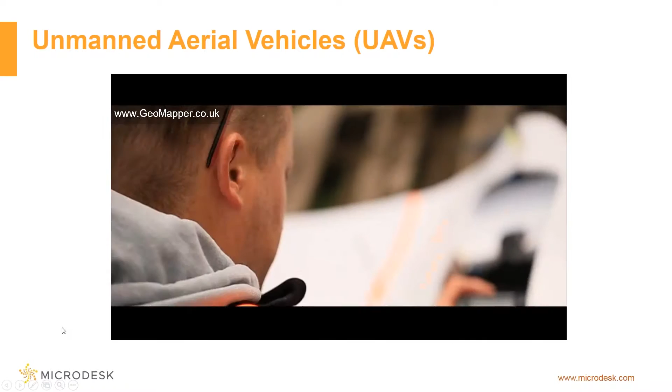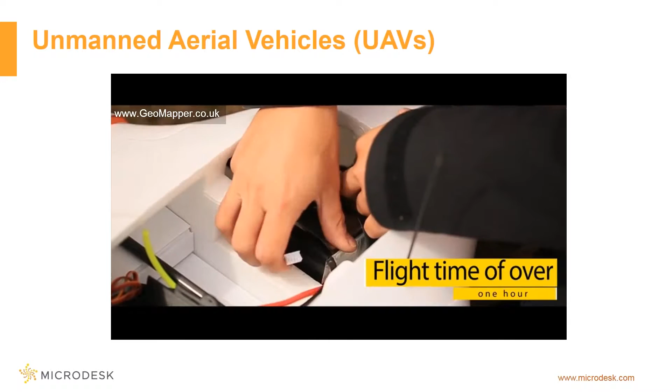I don't know if everybody else is experiencing this, but this is the fourth time I've watched this video restart. Slight technical difficulty, I apologize for that. So we'll let it run, hopefully it'll work out, but let's talk a little bit.

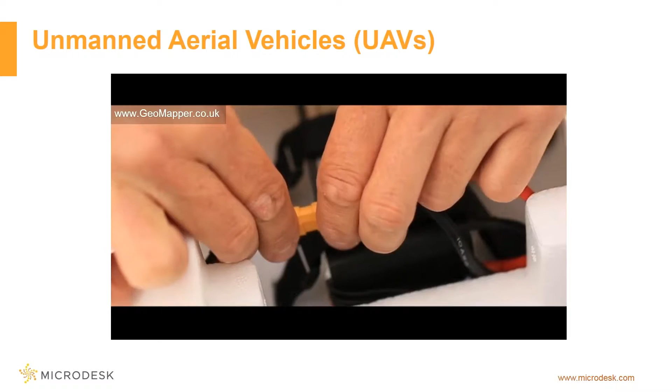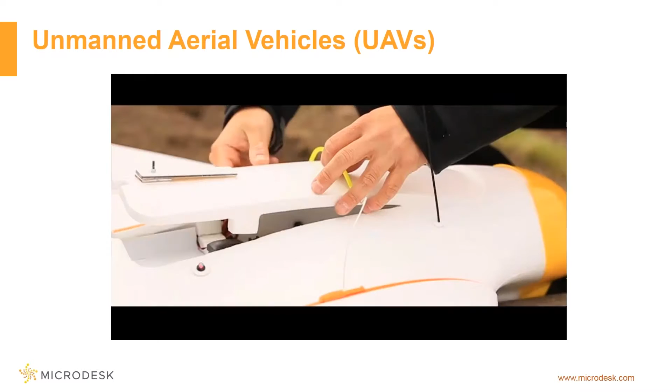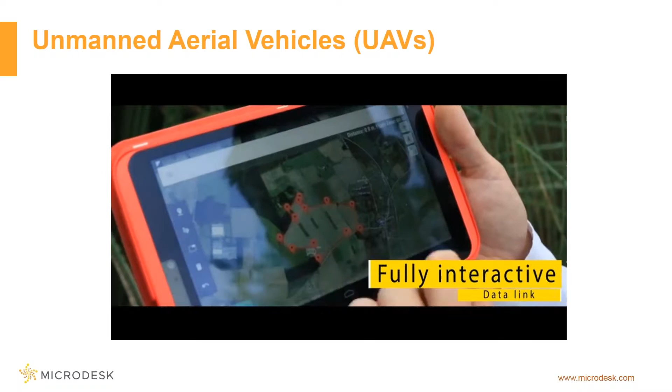I'm sure most of you have heard of them, but for those who haven't, UAVs, unmanned aerial vehicles, also referred to as unmanned aerial systems, are for all intents and purposes drones. UAVs are becoming increasingly popular as emerging technology in many industries. The lower cost of aircraft, cameras, and software, coupled with increased processing speed, cloud computing, and flight autonomy, has accelerated the adoption of UAVs to create existing conditions models, and they're also used for site inspections during construction.

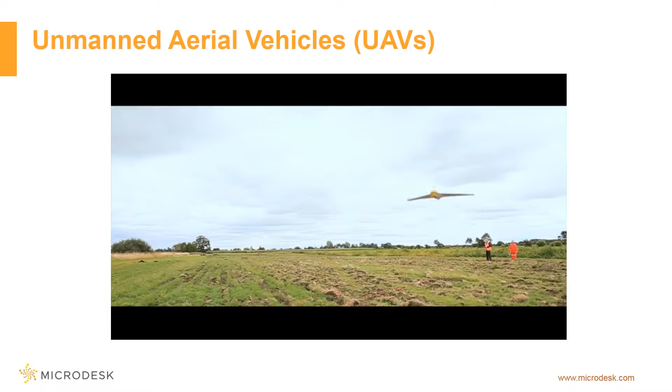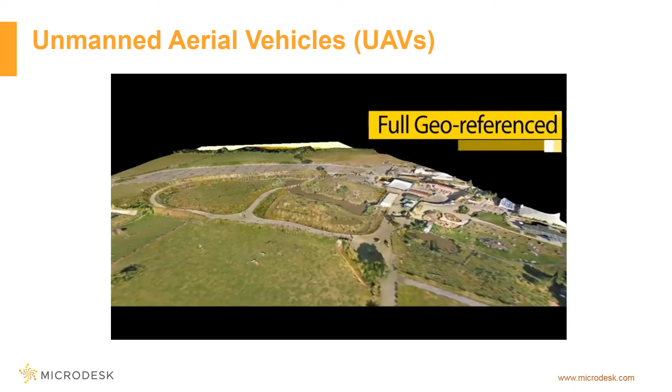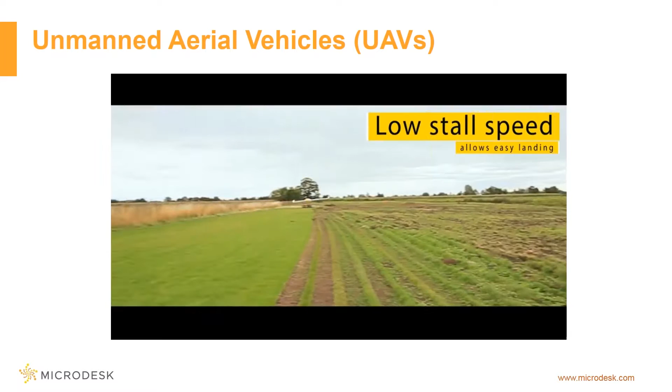LiDAR, or photogrammetry, is gathered through the use of high-definition scanners or cameras. They're mounted on a gimbal from the aircraft, and the UAVs can be remote controlled or have their flight plans automated. As seen in this video, once collected, the information is then stitched together using software such as Autodesk's ReCap 360 Pro, which will produce point clouds or models of the information.

This emerging technology is also becoming increasingly popular for developing planimetric features, volumetric surveys, pollution modeling, urban planning, coastline management, oil and gas exploration, and archaeological surveys necessary for federal environmental studies. This technology allows existing site conditions to be recorded and modeled in hours instead of days, and can produce more accurate data than traditional ground surveys.

Remember, we want to produce faster, higher quality data.

In my experience, surveyors are very particular about the topographic survey. With the advancements of BIM and the pressure to adopt BIM for civil infrastructure, skepticism abounds. Almost a year ago, a study was performed by McIntosh Perry Surveying and UKKO, a Canadian mining and surveying firm specializing in UAV aerial topographic survey.

The task was to compare the horizontal and vertical accuracies of ground RTK GPS survey to UAV surveys. The field topographic survey resulted in acquiring 1,800 data points over a 100-acre site. Each point had an X, Y, and Z coordinate, and a digital terrain model was produced. The field accuracies were observed to provide results between 3 and 8 centimeters in each of the 3 axes over 95% of the observations. The combined accuracies averaged between 5 and 6 centimeters, an acceptable level for subdivision development and drainage modeling.

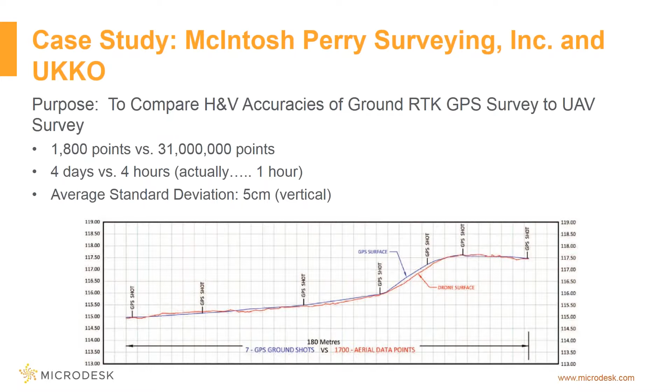All right, let's hope this video plays better than the last one did. All right. Start off a little bit slow on my end.

That's okay. So with UAVs conducting aerial LiDAR and photogrammetry surveys, the process and management of survey data will experience a major shift. The point clouds, meshes, and 3D solids will be referred to in lieu of returning to the site for additional field observation. The collected data will be edited and transformed to be used as terrain surfaces for watershed analysis and site planning.

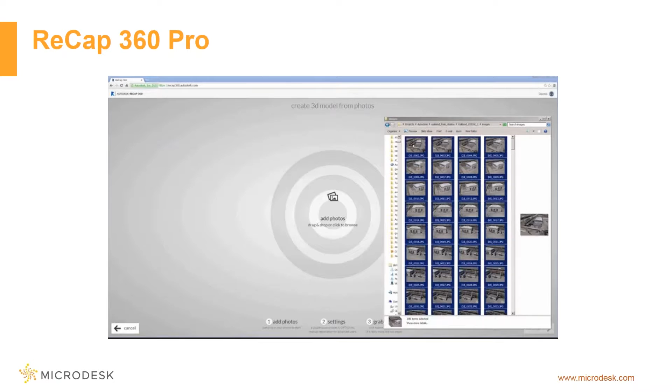This provides us with an opportunity to explore Autodesk's Recap 360 Pro. For those of you not familiar with Recap, this tool allows you to collect and process your point cloud and your UAV data into a single mesh model, as well as perform cleanup and geolocation.

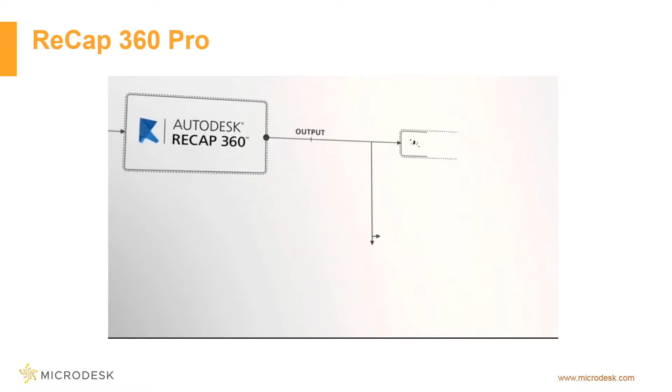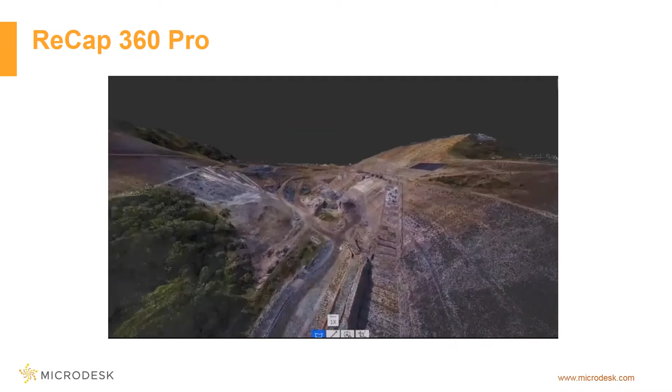Recap Pro also allows users to obtain measurements based on accuracy of points, generate reports directly from the software, and also gives you the ability to import ground control points and process photogrammetry obtained through UAVs. The collection of the data is of higher quality and is obtained faster, resulting in reduced project costs due to acquisitions and accuracies.

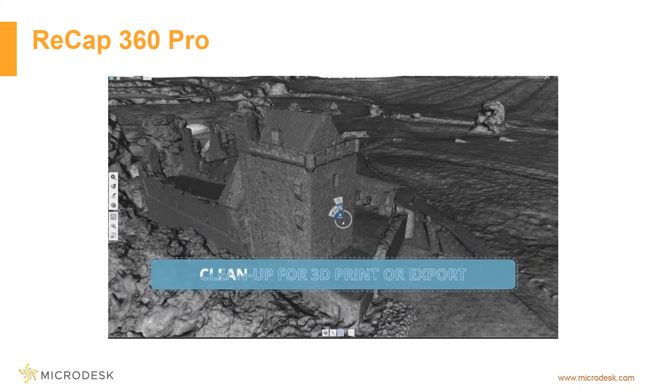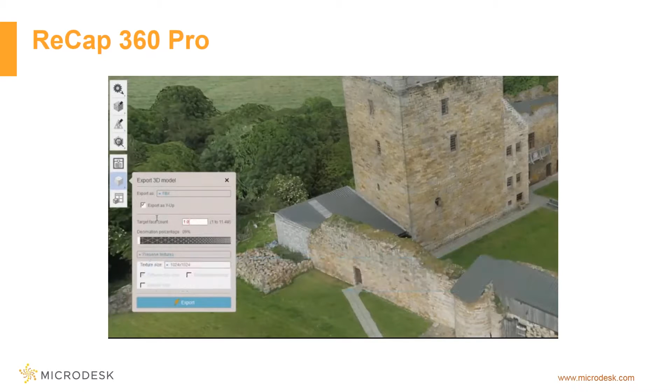Once the Recap mesh is completed, this data can be processed in Autodesk Memento. Memento allows users to perform mesh cleanup and optimization. Users will also have the ability to seal any holes or gaps there may be in the information, and the result is a much more optimized mesh with reduced polygon count, and all the materials at that point are then baked into the final output.

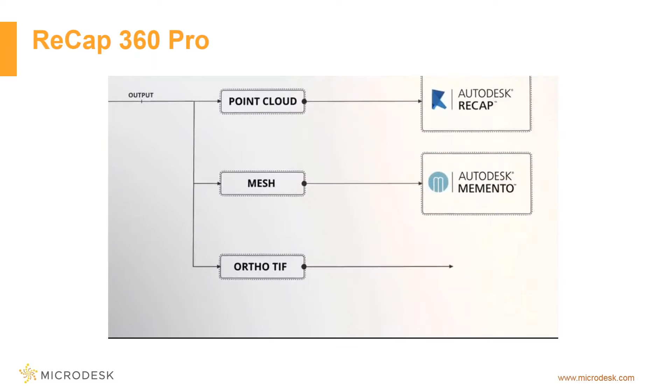And next, that data can be brought into Autodesk InfraWorks for planning or Civil 3D for detailed design.

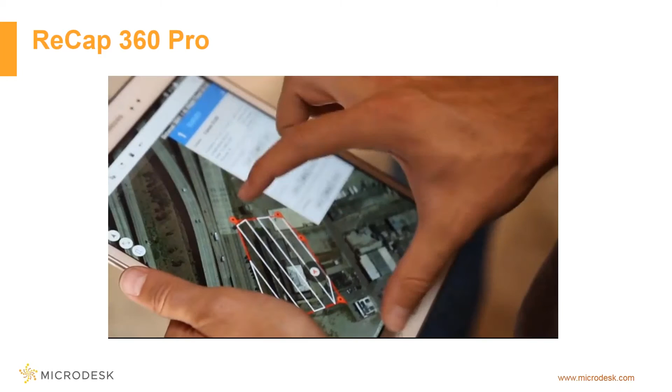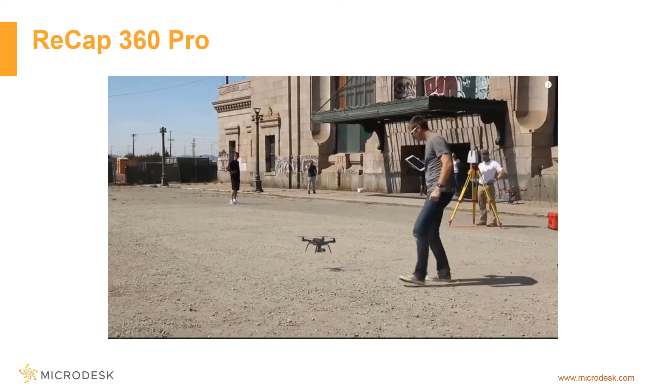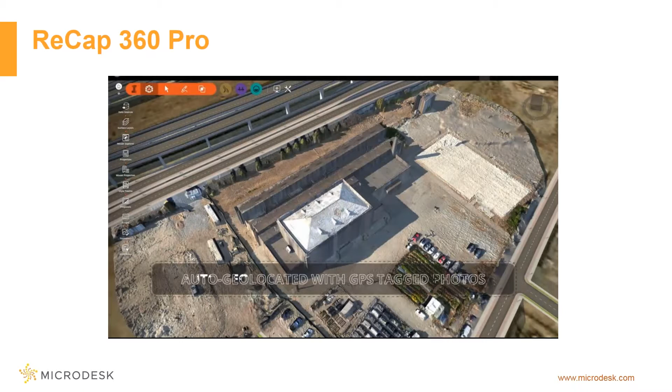Now, UAVs are also used for accurate geolocation of your model data, allowing efficient 3D mapping by utilizing ortho imageries to locate your model, and also to use the ortho model to verify accuracies in your model's elevational data. This is done in collaboration with auto-geolocated GPS tagged photos. The result is a highly accurate, fully integrated, reality computing pipeline of intelligent information that can be used for design as well as existing conditions and analysis.

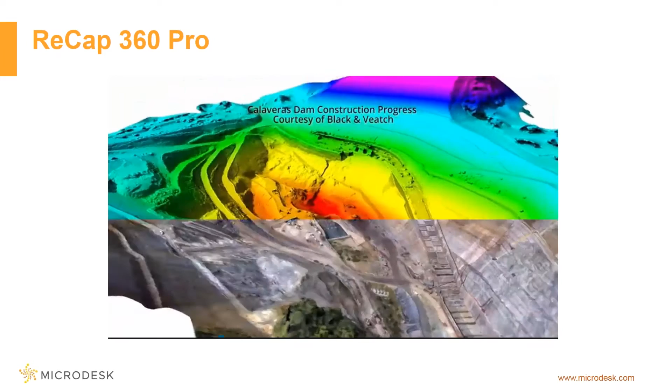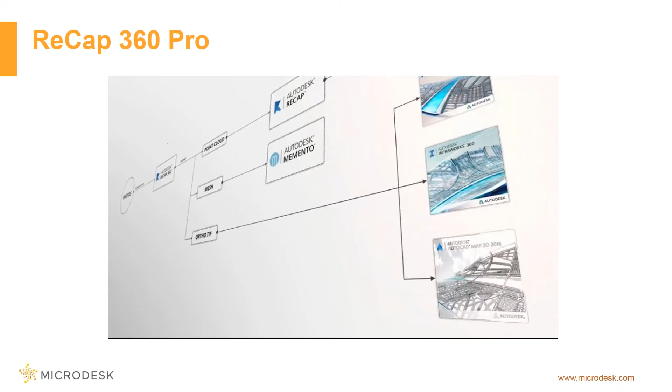And Brittany, can you back up one slide, please? Yes, this one, right? Correct. Okay, all right, that one looks like it's loading okay.

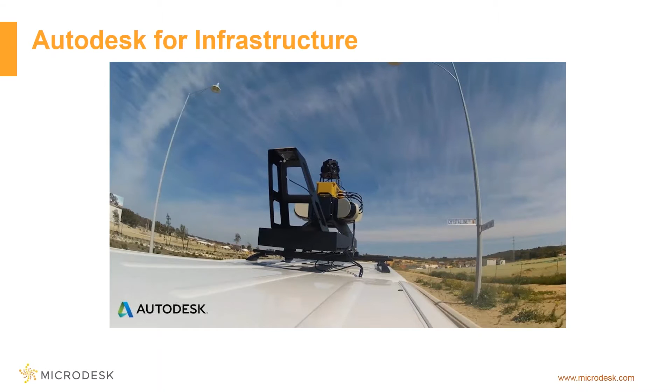An accurate view of the existing conditions is essential in planning and designing civil infrastructure projects. Without the tools to accelerate data collection and the processing workflow that runs parallel to the collection activities, time and money can be lost while waiting for a complete view of the existing conditions.

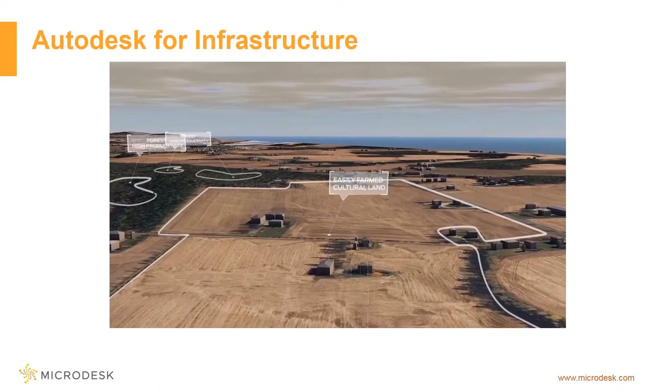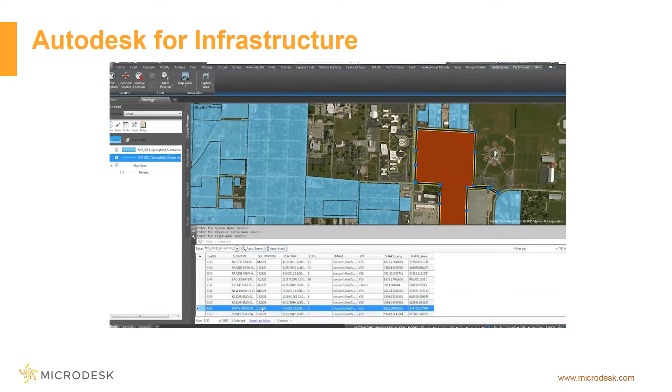Autodesk has the answer with a comprehensive software solution that helps you access and aggregate data, as well as collect, import, and process field survey data from a wider variety of sources. Connected workflows provide you with a way to build existing conditions models at a level of detail that is needed, and you can easily add to the model as the design progresses.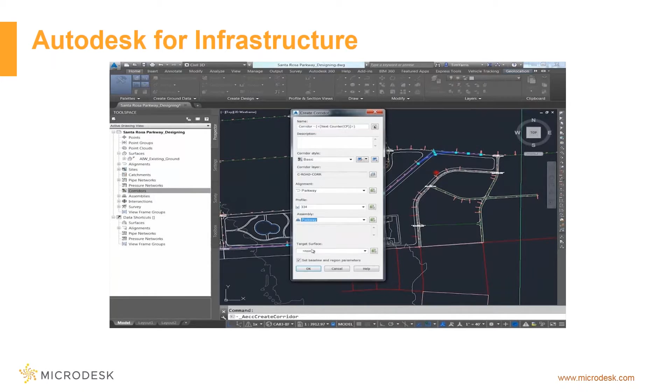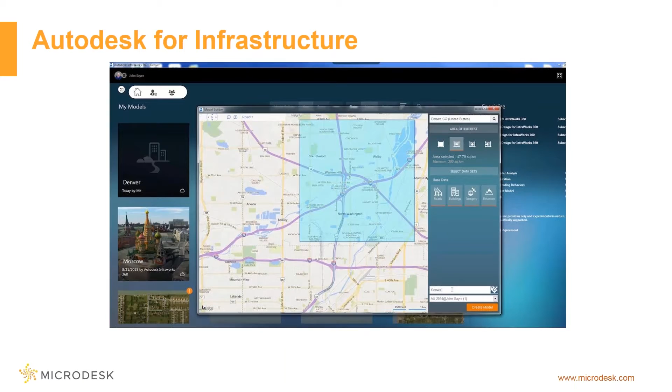With InfraWorks 360, you can build a 3D contextual model of the existing conditions in a matter of minutes. The power and capabilities found in Model Builder allow you to take advantage of freely available data, including terrain, roads, rail, building, water features. There's no need to manually locate the sources anymore, and all the coordinate systems are managed automatically.

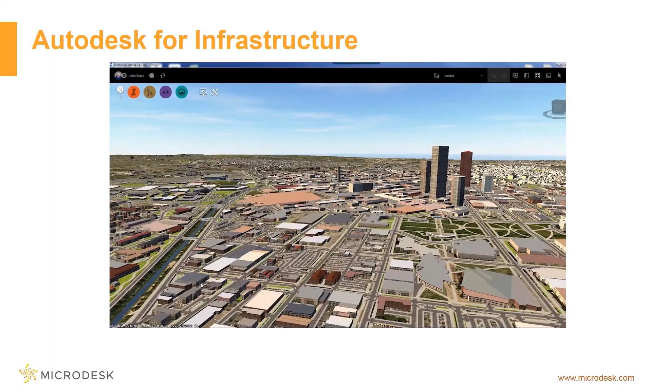You can then supplement the model by adding information from numerous other file types, such as CAD data, GIS data, point clouds, raster images, and file formats from other programs as well, such as Bentley, ESRI, and SketchUp. The result is a robust existing conditions model that establishes a strong foundation for project development.

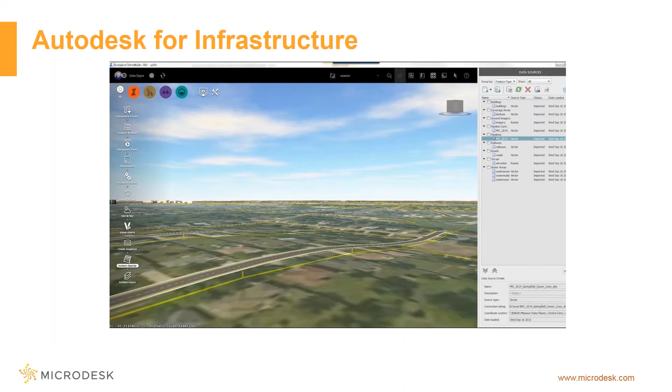As the design progresses, you can take that existing conditions into Civil 3D and add the detail that's needed to complete the design. The model can even be used to help survey crews be more prepared to collect additional data needed in the field with better visibility into the existing conditions before leaving the office.

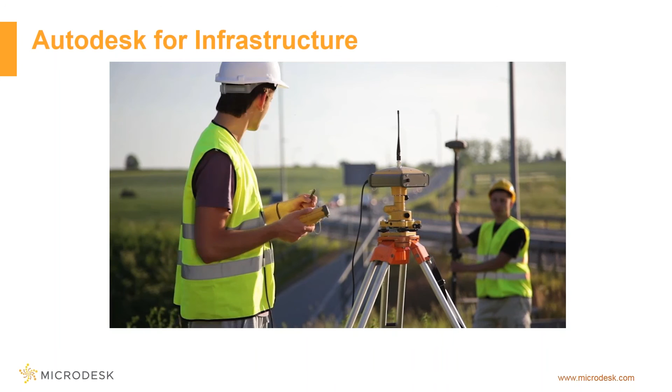With Civil 3D, line work from survey data can be automatically generated and populated in the model. Accurate and up-to-date surface models can be generated from topography, and contours can be adjusted, and boundaries can be easily redrawn to more accurately represent the detailed surface.

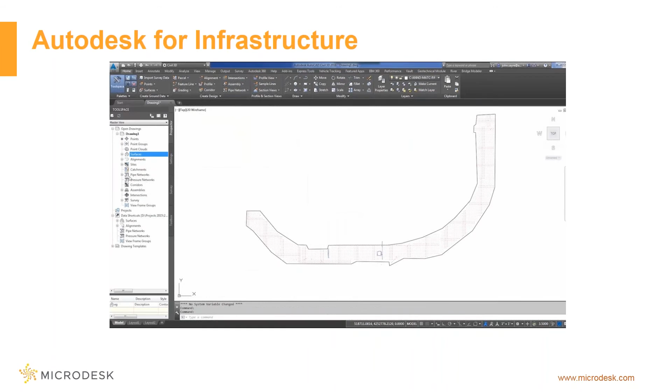As work progresses, you can continue to add survey information to the model without the need of reworking the design. All related elements, including surface models, profiles, grading, corridor models, will all rebuild automatically, saving you valuable time on the project.

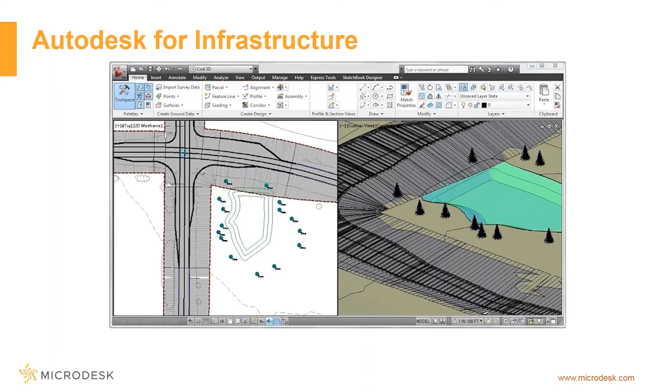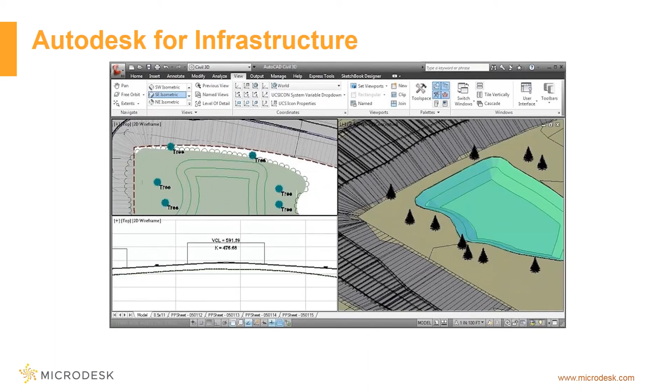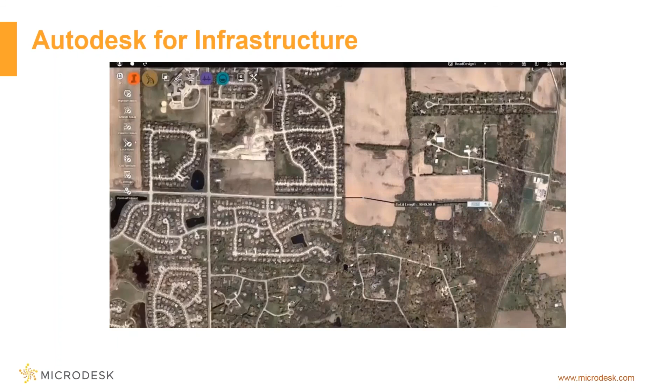With Autodesk and BIM for infrastructure, you can more easily access and aggregate data from a wide range of sources, giving you the ability to create accurate and intelligent existing conditions models faster, with less time spent reworking and reprocessing. Autodesk BIM for infrastructure helps your project team anticipate, assess, and act more confidently throughout the project lifecycle.